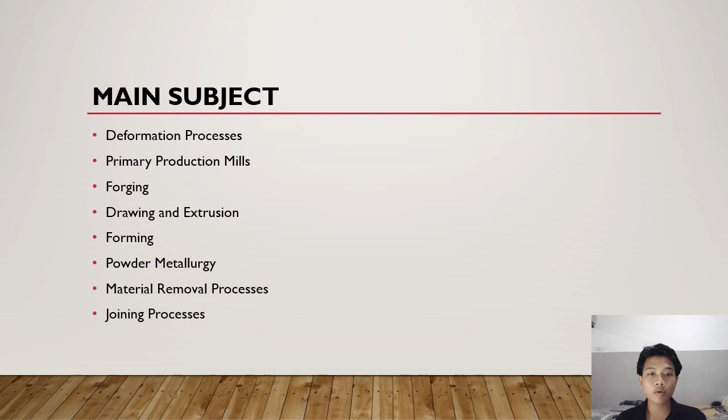About my book reference, we still use the book Metallurgy for the Non-Metallurgist, the second edition, edited by Arthur C. Reardon. For the main subject, we talk about the deformation process, primary production mills, forging, drawing, extrusion, forming, powder metallurgy, material removal processes, and joining processes. So let's talk about fabrication and finishing of metal products.

Metal products that are subject to mechanical reduction operations subsequent to casting and solidification are referred to as wrought products. These products can be shaped, finished, and assembled by using a variety of metalworking techniques, which may include metal forming, material removal, and joining.

Let's talk about the first point. It's about the deformation process. In the deformation process, a workpiece such as a billet or a blank sheet, for example, can be plastically deformed by a set of tools or dies to obtain the desired final thickness and geometrical configuration. Metal forming processes can be classified into two general categories. First is bulk or massive forming operations. Second is bending and sheet forming operations.

Let's talk about the metal forming equipment. Metal forming is done with a large variety of machines or equipment, such as rolling mills for plate, strip and shape, machines for profile rolling from strip, ring rolling machines, thread rolling and surface rolling machines, magnetic and explosive forming machines, draw benches for tube and rod, wire and rod drawing machines. Then the last is machines for pressing-type operations.

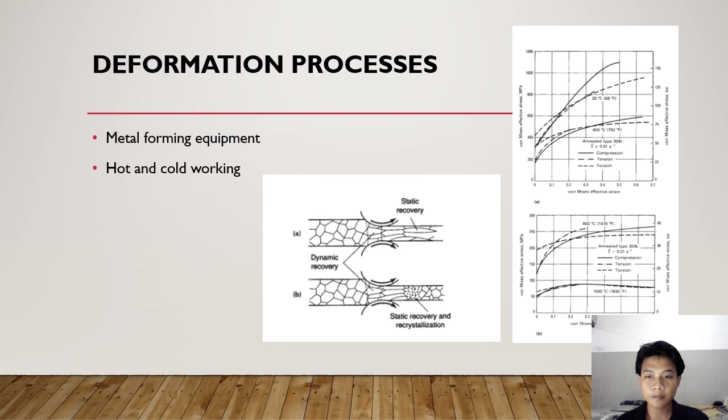Then let's talk about the next point. It's about the primary production mills. In primary production operations, the initial stage of metalworking involves the breakdown of a cast structure into a wrought form. The starting material is usually either an ingot from static casting or a continuous cast slab or billet.

Let's talk about ingot breakdown. Many ingots continue to be statically cast because not all ferrous and non-ferrous metals are capable of being continuously cast. Due to their relatively coarse and inherently weak microstructure, the temperature range over which ingot structures can be forged is very limited. Typically, ingots must be hot worked to refine the grain structure in order to allow recrystallization to occur. Hot working is usually performed at temperatures greater than three-fifths of the absolute melting point of the alloy.

And mill production. Mill production of blooms, billets, and slabs produces various products such as plate, sheet, strip, and bar. The metal of these wrought products is stronger and much more homogeneous, that is, a uniform grain structure, than at the ingot stage. These mill products may be provided in finished form for application, or the product may undergo additional processing, including forging, stamping, machining, welding, etc., for end products ranging from soda cans to panels destined for car and pickup truck bodies.

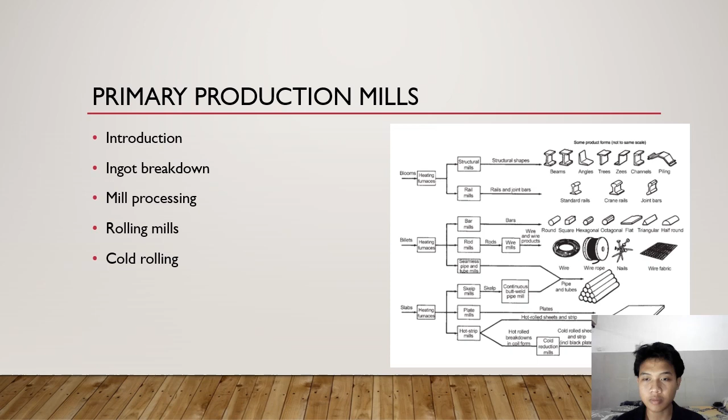Yeah, we move to the next point. Let's talk about forging. Forging in its basic form consists of applying compressive stresses to a piece of metal, known as a workpiece, between a pair of dies in order to permanently change its physical dimensions or geometry.

And let's talk about open die forging, sometimes known as hand, smith, hammer, and flat die forging, a process in which the metal workpiece is not confined by dies. Open die forging works the starting stock by progressive blows between two anvils or dies, one of which is stationary while the other is actuated by a large press. The face of the anvil may be flat or recessed with V-shaped or concave depressions. The material is gripped and handled by manipulators. Reductions are obtained by deforming localized areas of the workpiece.

Closed die forging, often referred to as impression die forging, is the shaping of metal completely within the walls or cavities of two dies that come together to enclose the workpiece on all sides. Roll forging, also known as hot forge rolling, is a process for reducing the cross-sectional area and changing the shape of heated bars, billets, or plates by passing them between two driven rolls that rotate in opposite directions and have one or more matching impressions in each roll.

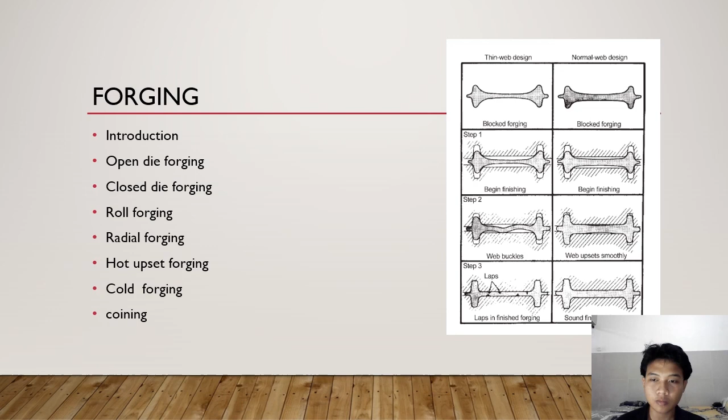Drawing and extrusion. In introduction, drawing and extrusion are based respectively on the pulling and pushing of sections through dies. In the drawing process, the cross-sectional area and/or shape of a rod, bar, tube, or wire is reduced by pulling it through a die.

Deformation is accomplished by a combination of tensile and compressive stresses that are created by the pulling force at the exit from the die and by the die configuration. Drawing is one of the oldest metalforming operations to make long products with excellent surface finishes, closely controlled dimensions, and constant cross-section. Wire and tube are drawn in similar manners.

The general practice is to place a mandrel, also called a plug, or a solid bar with a blunt end inside of the tube. As the tube is drawn, metal flows past the mandrel, which controls the inside diameter of the tube and supports it during deformation.

Extrusion is the deformation process used to produce long, straight, semi-finished metal products such as bars, solid and hollow sections, tubes, wire, and strip. The favorable compressive states of stress during extrusion allow high capacity for deformation, and so it is possible to extrude metals that can be only slightly deformed by other methods.

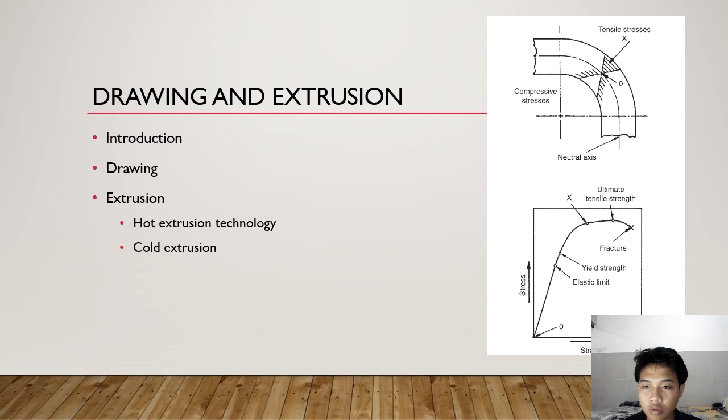Cold extrusion. In this process, metal is squeezed through a hole in the die. Low melting point and relatively ductile metals such as aluminum, tin, and lead are easily extruded. The most commonly cold extruded metals are, in order of increasing processing difficulty: aluminum and aluminum alloys, copper alloys, low and medium carbon steel, modified carbon steel, low alloy steel, and stainless steel. Special lubricants are used for the cold extrusion of certain steels.

Further adjusting the camera,

And let's talk about forming. Metal tube, plate, and sheet are formed by various bending, stretching, and drawing operations. Bar and tube are formed mainly by bending operations such as compression bending, stretch bending, draw bending, and roll bending. Sheet forming includes various bending, stretching, and drawing operations, plus some special methods to develop surfaces with deep recessing, including spinning and deep drawing, or shallow recessing, including dimpling, jogging, and explosive forming.

There are 4 basic methods for bending bar and tube: compression bending, draw bending, stretch bending, and roll bending. You can see the bending in the picture. There are 4 basic methods for bending bars.

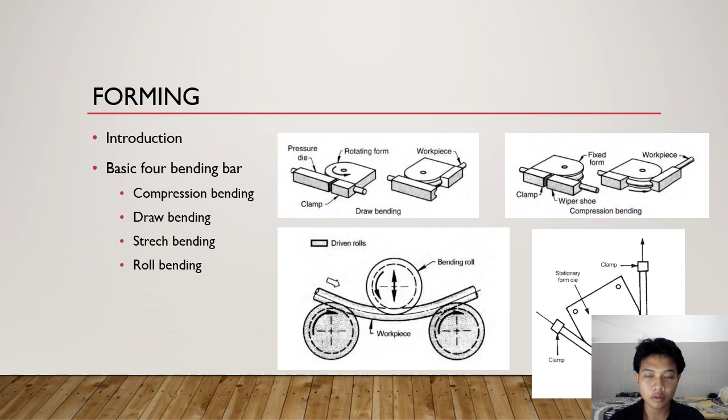Let's talk about powder metallurgy. Powder metallurgy is a growing branch of metallurgy based on the production of material in the form of metal powder and the manufacturing of parts from this material. Fabrication of parts by the powder metallurgy method has several advantages, including production of parts with more uniform microstructure and distribution of alloying elements, high volume production of parts with net shape or near net shape dimensions, reduction of the need for machining, and flexibility in component design.

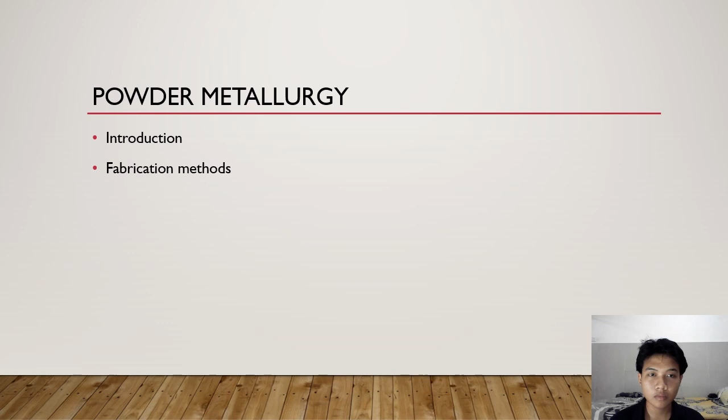Let's talk about the material removal process. Material removal processes, of which machining is a special class, are secondary manufacturing operations used to achieve precise tolerances and controlled surface finishes. There are 3 basic material removal processes: 1, conventional machining operations, 2, abrasive processes, and 3, non-traditional machining processes.

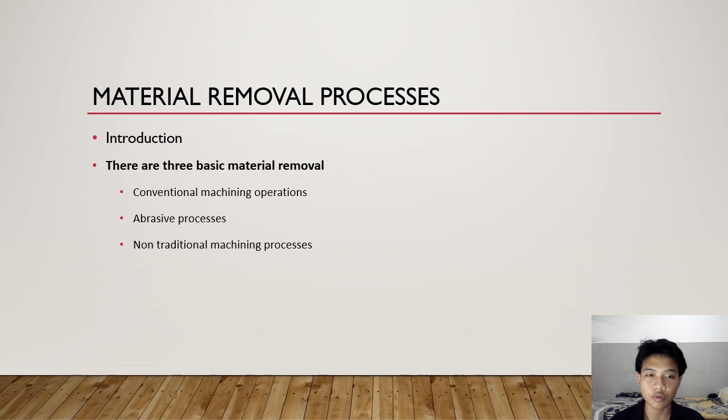And the last point, the joining process. Joining processes involve the use of mechanical, chemical, or physical forces to keep 2 parts together. Mechanical methods are based on various types of mechanical fasteners, while adhesive bonding uses chemical bonding, perhaps with some physical or mechanical factor. Physical methods of joining include welding, brazing, and soldering. The focus here, by necessity, is only a brief overview of the wide-ranging technologies of welding, brazing, and soldering.

Welding. 2 types of modern welding: fusion welding, where the metals are melted in the joint region and allowed to resolidify to form a metallurgical bond, and solid-state welding, like forge welding, where some heating without melting and mechanical force allow the formation of a physical bond of the two metals.

Brazing. Brazing involves joining solid metals in close proximity by introducing a liquid metal that melts above 450 Celsius, or about 840 Fahrenheit degrees. A sound braze generally results when a proper filler alloy is selected, and the parent metal surfaces are clean and remain clean during the heating.